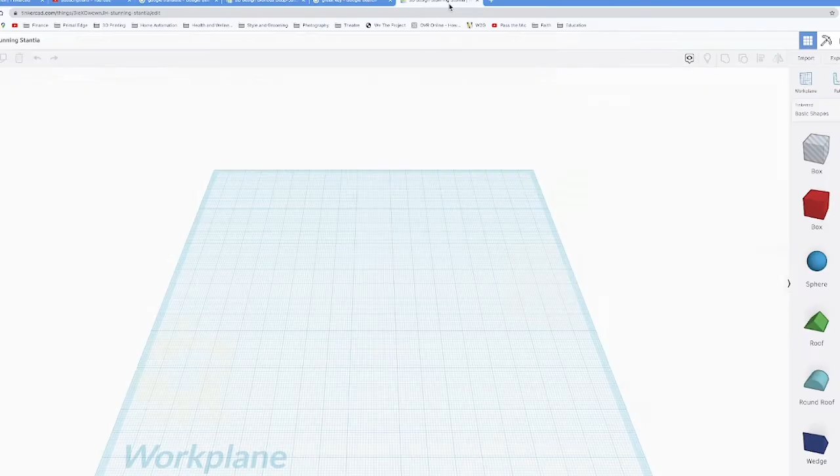You'll see what I mean in a second. So I need an image for reference, and this one should work. Now, if you look close, you'll see it's really nothing more than a series of squares and lines. And we should take note of how this thing is laid out. I want my lines to be about 2 mil wide, and if you look here and count each of these parts as 2 mil, you'll see we basically have a 14 mil square. So let's go ahead and pull in a square.

I'm going to make it 5 mil high, and then I'm going to make it 14 by 14 like you see here. I'm going to duplicate that using Control D, then dupe it once more, drag it over. Hold on, my bad. Drag it over here, and we'll make this puppy a hole.

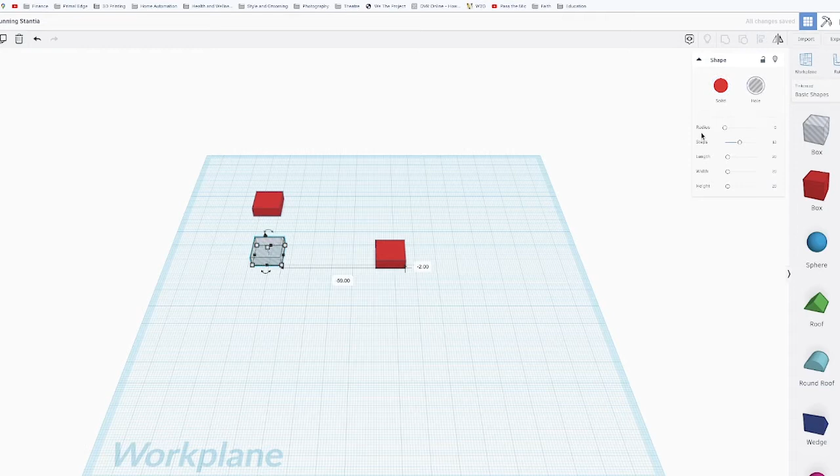Okay, let's adjust the view here to make things easier. Whoa. There, that's much better.

Okay, now let's check out our reference image. We're going to start with this part here. We're going to create these 3 sides.

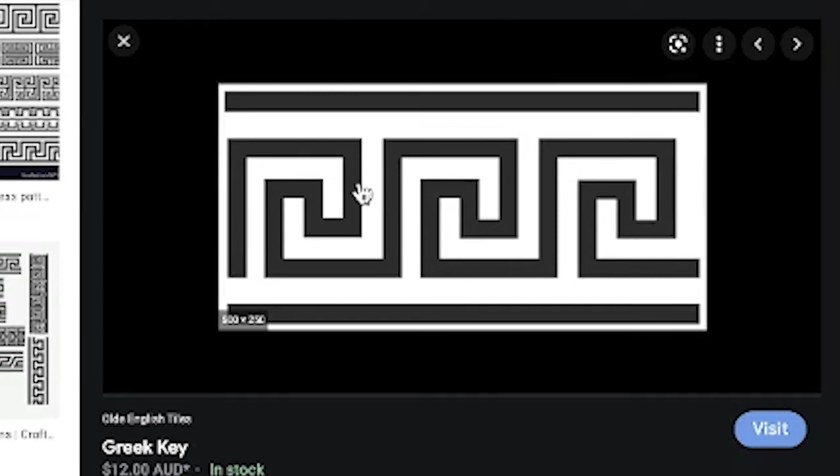So let's duplicate the hole that we made earlier, and I'm going to use the grid to keep things organized, and I want to maintain that 2 mil sizing. I'll resize the hole to accommodate what I need to remain, and then align the hole like this. Now, you might think that reducing it by 2 mil will get you that 2 mil that you need, but you have to account there are 2 sides here. So what that means is 2 on one side, 2 on the other. We're going to have to shrink this down by 4 mil altogether. This will give us 2 mil on both sides.

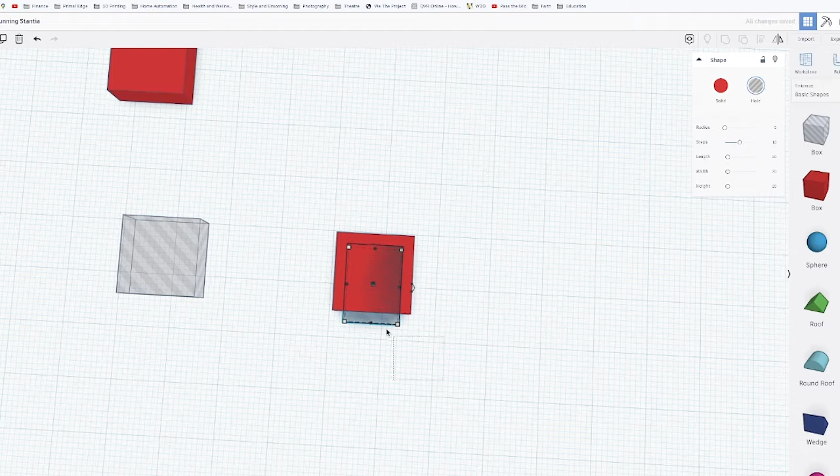Now we're going to align it left to right. I'm going to drag it to the top using the arrow, and I'll nudge it down by 2 using the down arrow. I'm going to select everything. Then I'm going to group it, and there we are, off to a great start.

So you can see here that the right side doesn't go all the way down in our reference photo. Using that same 2 mil scale, we can see that it's up 2 rows, which means 4 mil in total. So let's go ahead and duplicate this hole. Move it up 4 mil starting from here, and cut away the extra.

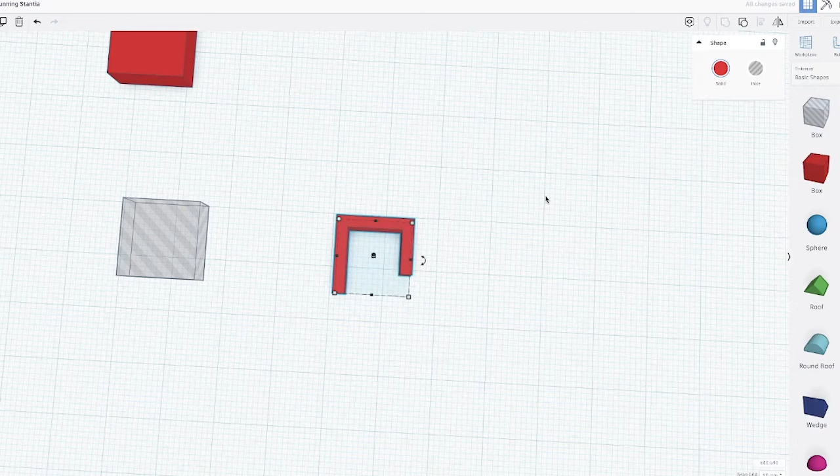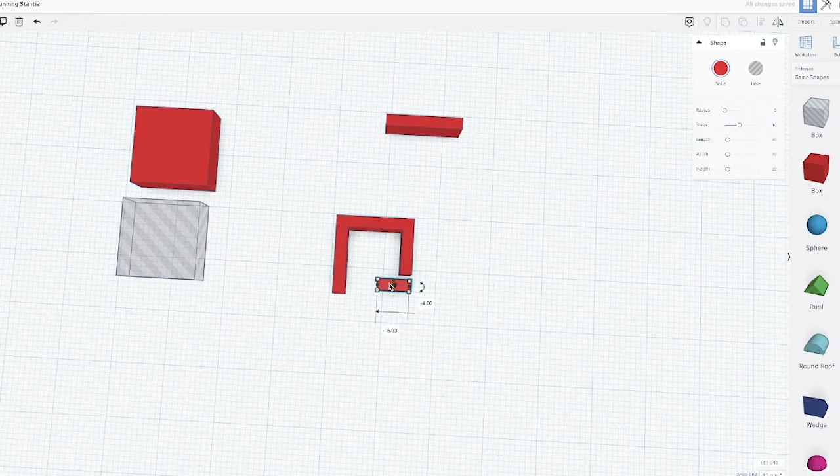Perfect. Now we can start adding lines, like this one. We'll duplicate this piece and resize it, and it appears to be 2, 4, 6 mil long. Let's dupe this piece first. We'll type 6 in here, slide it into place, making sure we overlap like you see here. Moving on, we can just rinse and repeat.

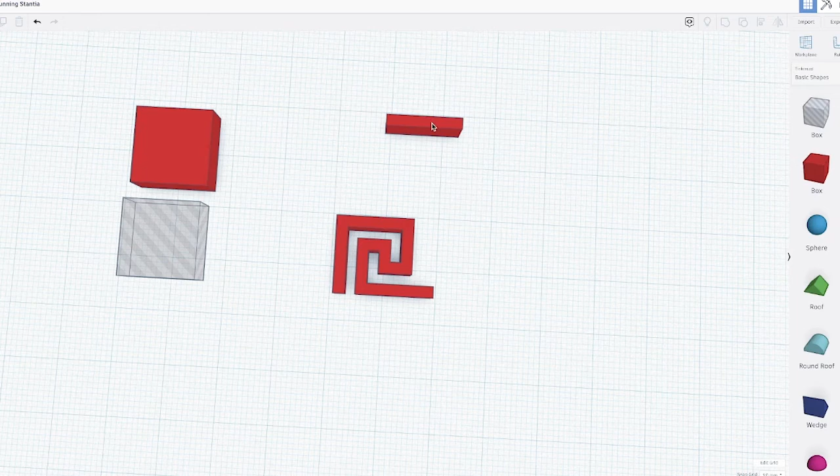Now here you can see I extended the bottom line 2 mil, and this will become clear later as to why. From here we can select everything, group them together, and now go ahead and add the top and bottom lines. Starting from here, we'll go up 2 mil, got to extend it 2 mil here.

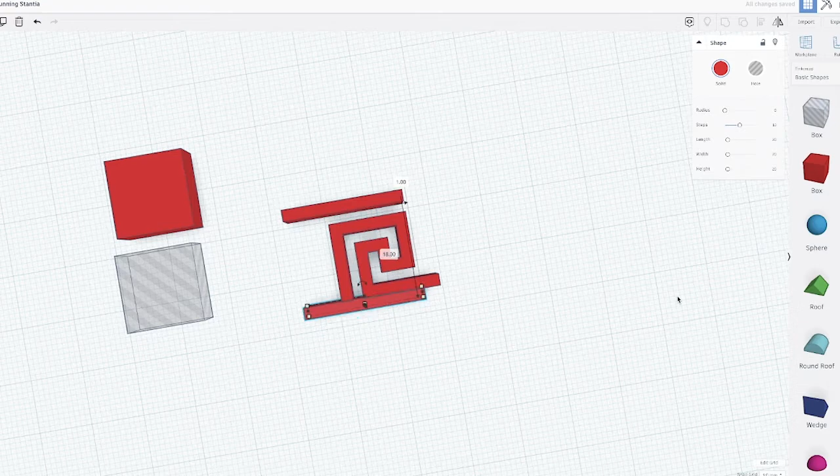Let's duplicate it, drag it to the bottom, and align it. Take note that the bottom lines are extended slightly—this will come in handy and be clear in a little bit. Now let's go ahead and group everything together.

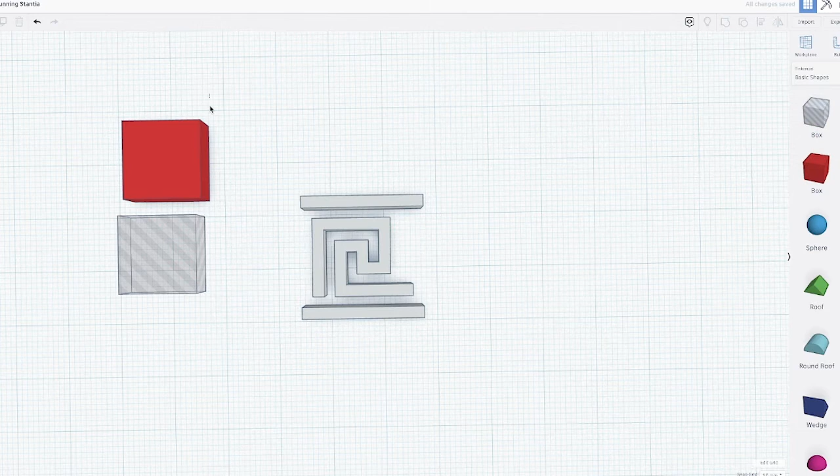Change the color so what we see is a bit more appealing and easier to see. Pretty cool so far, but now let's have some fun.

Let's go ahead and drag in a circle. We're going to bump up the sides to the max so it's a round circle. Adjust the height—that'll work for now, leave it here.

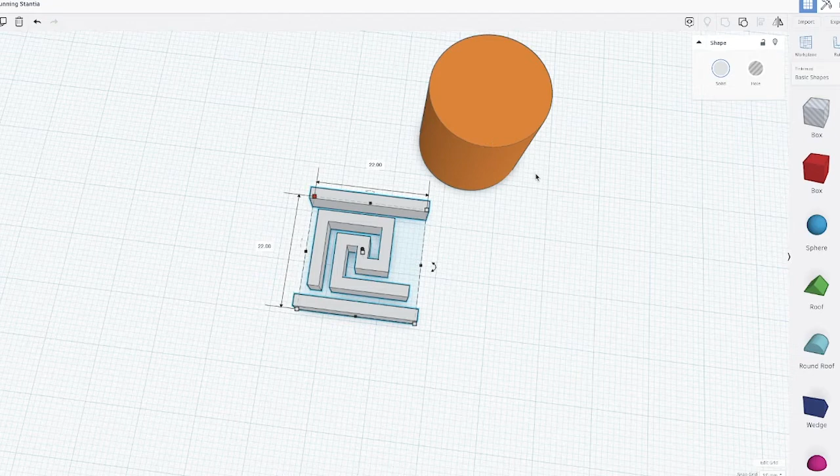Let's go ahead and scale down the key by half on these two sides so it fits properly. We can rotate it by 90 degrees, and align it to the workspace at 0 by hitting D.

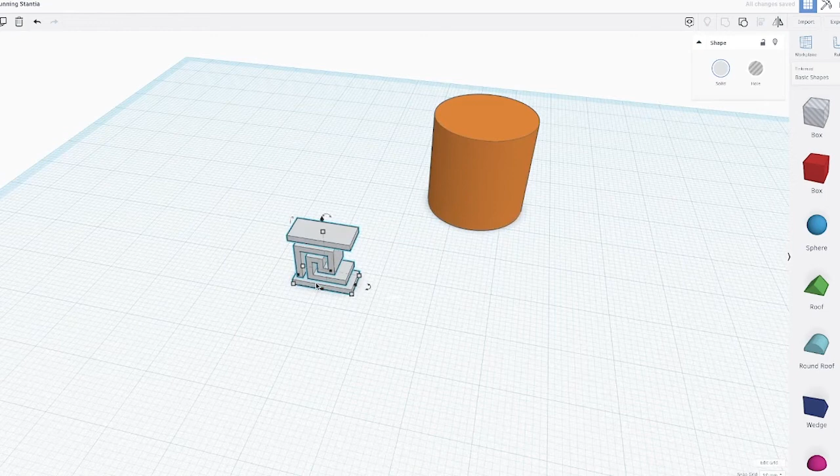Let's go ahead and extrude this thing out a good ways. It's not too critical how much, just as long as it's larger than the circle, kind of like you see here. Drag it over. Using the align feature, we're going to do a quick XYZ align. Oops—there we go.

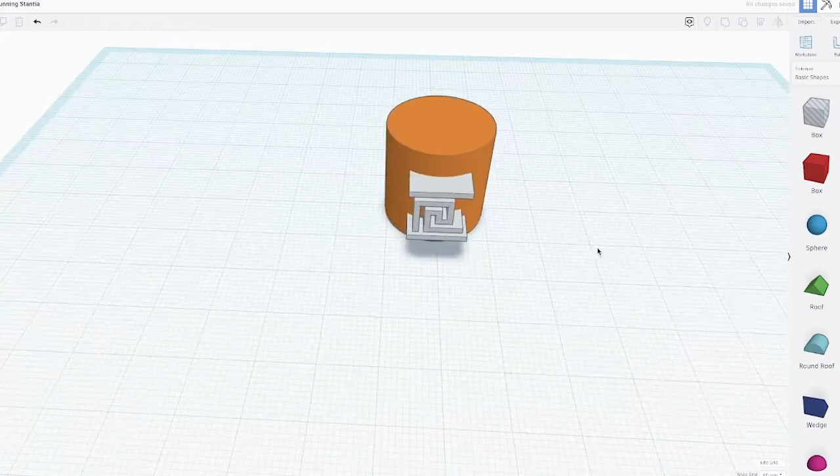Now we're going to use the dupe feature to do something pretty tricky. First, select and dupe the key, the Greek key that is. Then we're going to rotate it by—I don't know how many degrees yet. This is kind of trial and error.

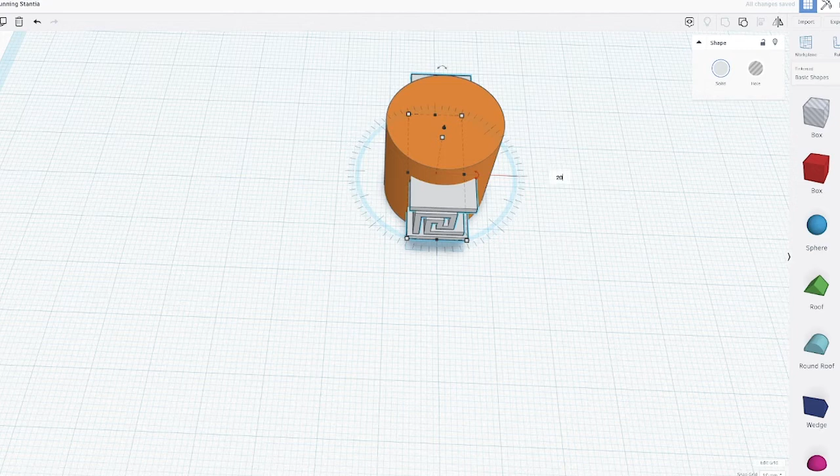We need to test to see what's best for this scale and this design. Like I said, trial and error. You're looking for no visible gaps and no overt overlaps here. Plus, whatever that angle is, it should, if at all possible, be divisible by 360—20, 45, 90, 60, something like that.

One thing to keep in mind: if you dupe it and then change the angle and it's wrong, you've got to delete that duplication and start the process over again—selecting your object, duplicating it, and changing the angle. If you don't do this, the trick won't work.

Like I said, it takes a good bit of trial and error, but this one I think will be close enough to show you what I'm talking about here.

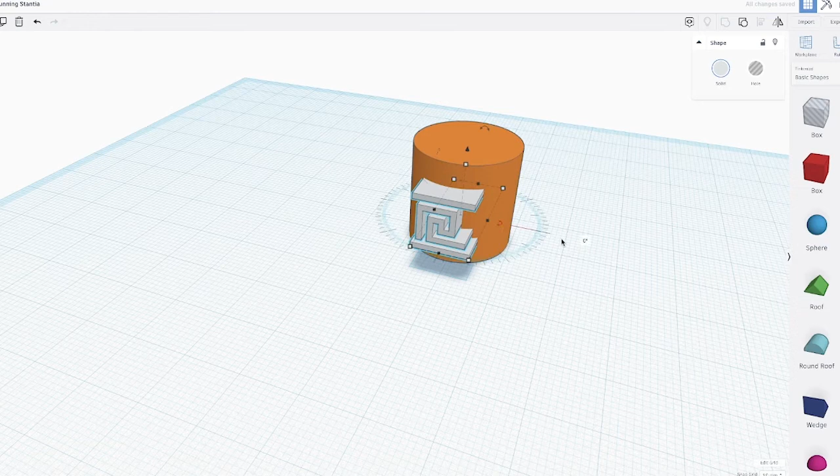Perfect. Now simply use the shortcut keys Control-D, and you'll see that it's going to predict your next move. You keep doing it over and over again until you've gone full circle. Like that. Now let's move the circle and group the keys.

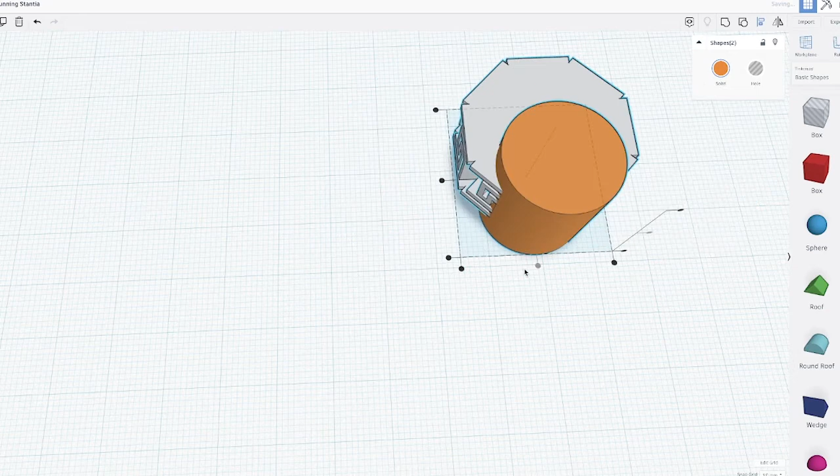Then we're going to realign everything. Now we're going to select and duplicate the circle. We're going to make it larger by about 2 mil—this will give us a full even 1 mil overlap around the whole perimeter of the original circle. We've got to align it first, of course.

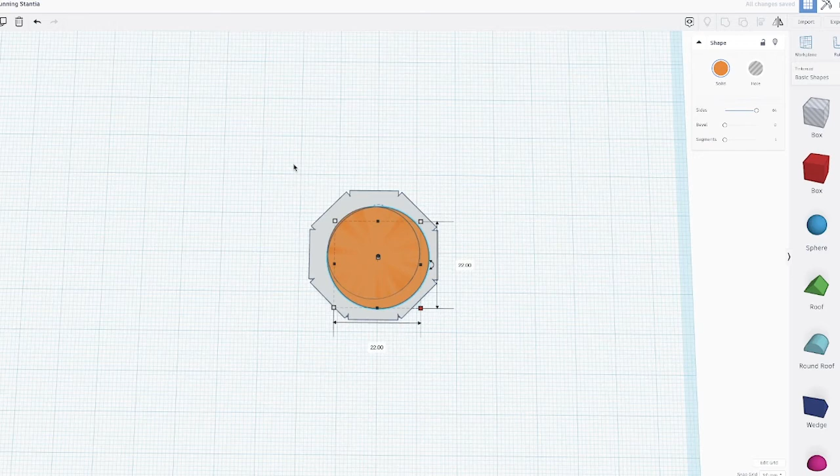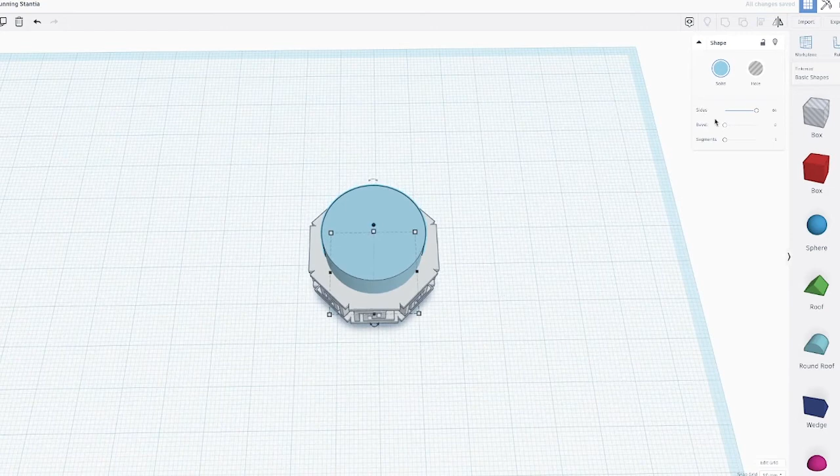Changing the color to keep my shapes organized. Let's make just the larger circle, the blue one, taller. Sink it down a little bit below the workspace—we're going to turn that into a hole.

Now we're going to drag in a square and make it larger than everything, like this. Now, selecting only the hole and the square, click one—either the hole or the square—then hit Shift and click the other object. We're going to group those two items together, like this.

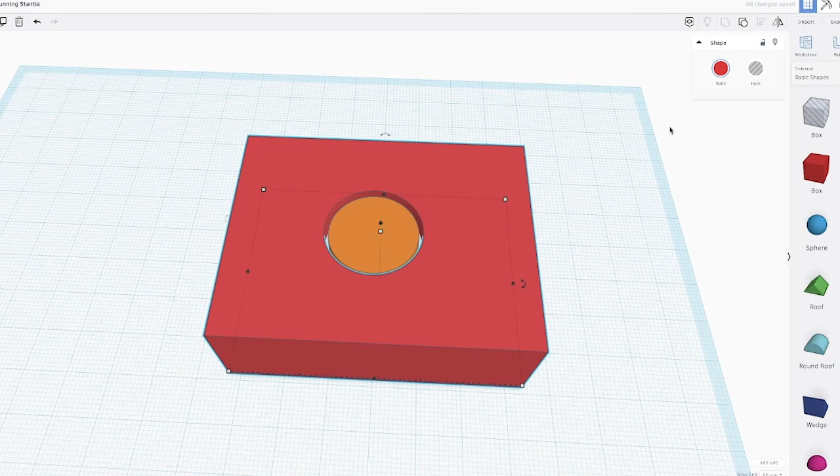Now we have a hole inside the square. And the hole, if you can see here, is 1 mil larger than the original orange circle, which is exactly what we want. Now we'll turn this square into a hole.

Now select the grouped keys. It's a little bit tricky, but there we go. Shift click the hole that you just created from the square, and group them.

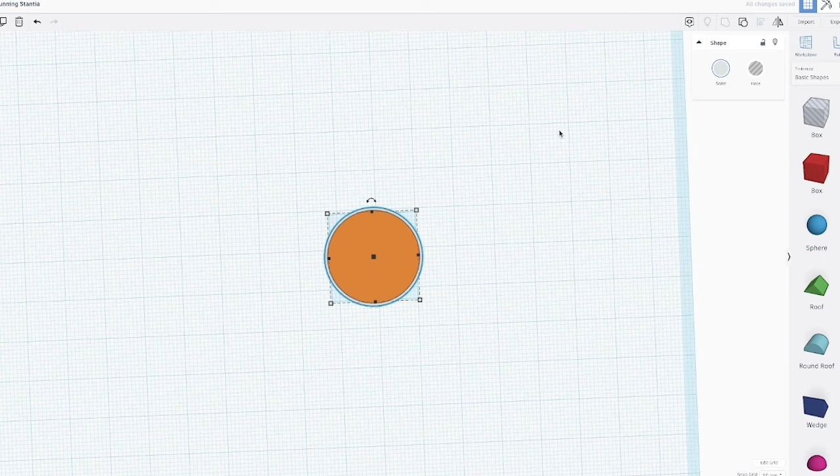And check this out—at this point, you can have fun and do whatever you want. I made a ring for my daughter and it came out awesome, she loves it. But really, you're only limited by your imagination.

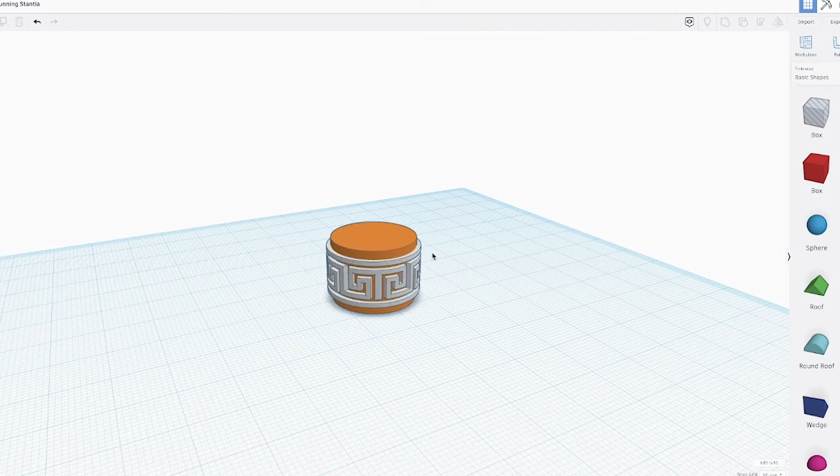Folks, hopefully the techniques I used here today may come in handy for any project that you're working on.